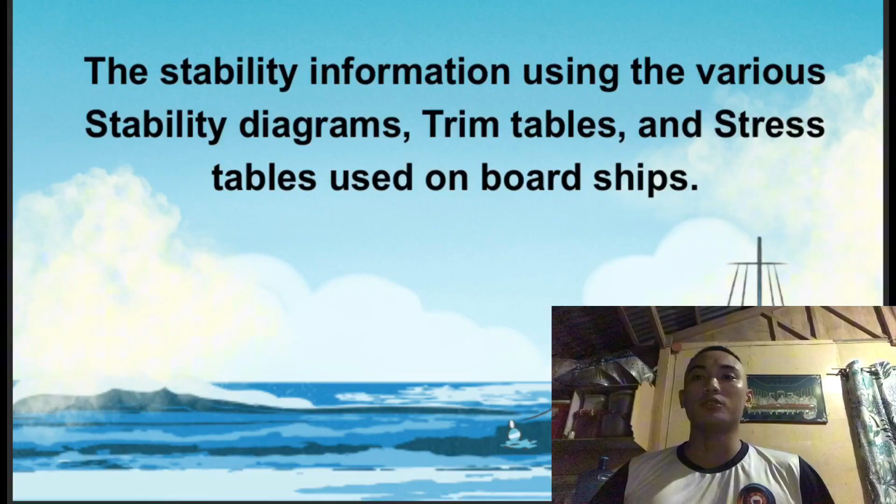So for today's video, I'm going to discuss the stability information using the various stability diagrams, trim tables, and stress tables used on board ships. So stability diagrams. These diagrams visually represent the forces acting on a ship. They show the CG, CB, and M, which are crucial for understanding how a ship responds to heeling or tilting.

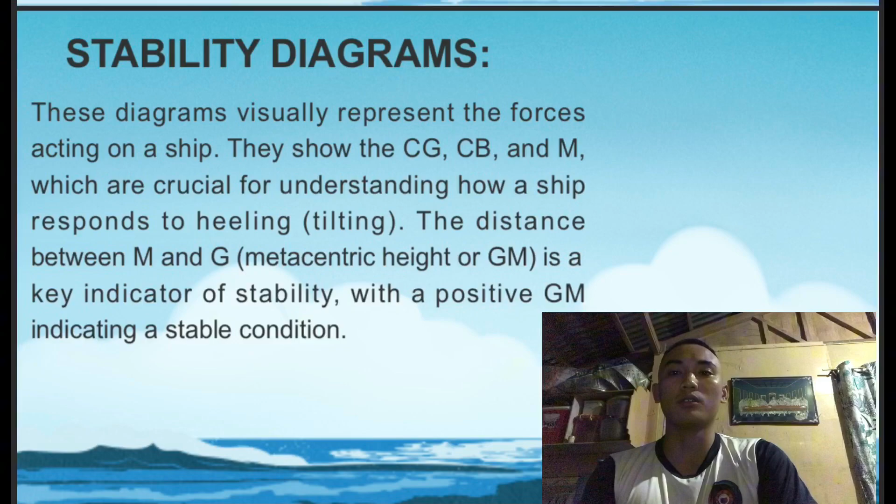The distance between metacenter and center of gravity, or metacentric height, is a key indicator of stability, with a positive GM indicating a stable condition. Stability diagrams illustrate the relationship between the center of gravity, center of buoyancy, and the metacenter.

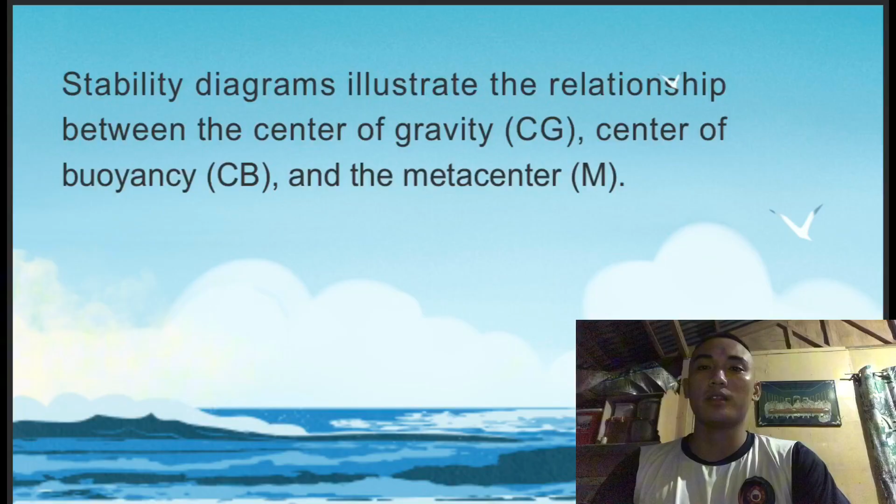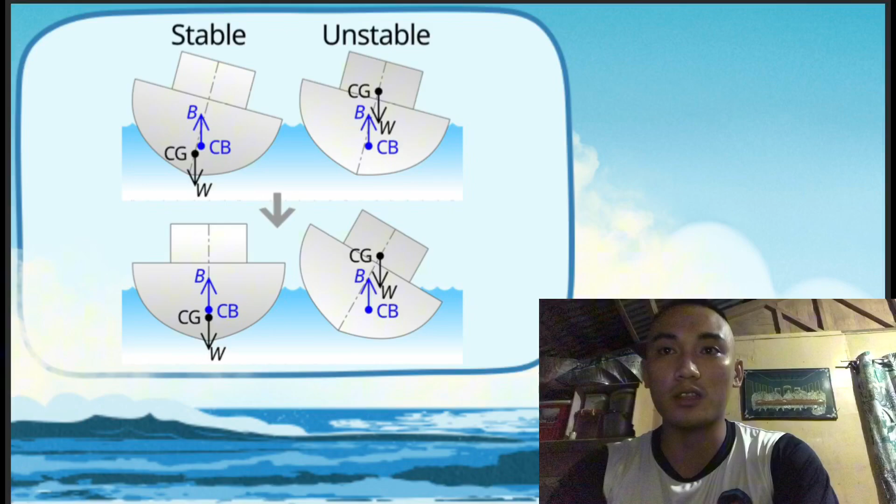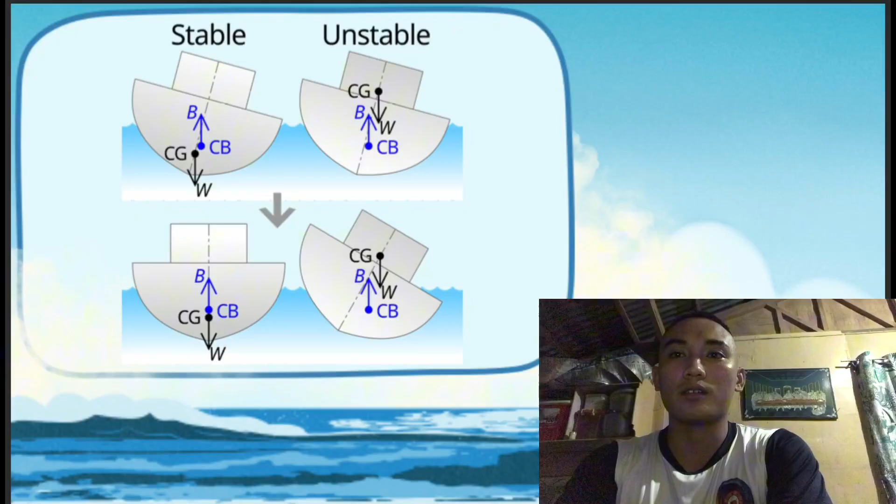Trim tables provide rapid and reasonably acceptable drafts forward and aft after loading, discharging, and shifting weights that are not too large. These tables are usually part of the ship's stability booklet. The tables provide for change in draft forward and aft when tanks are filled to their capacity, and for loading of 100 tons weight at different positions along the ship's length.

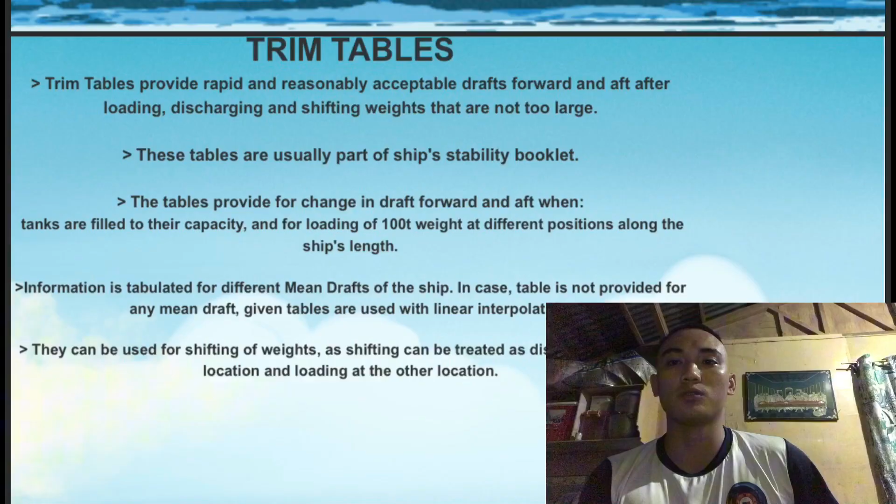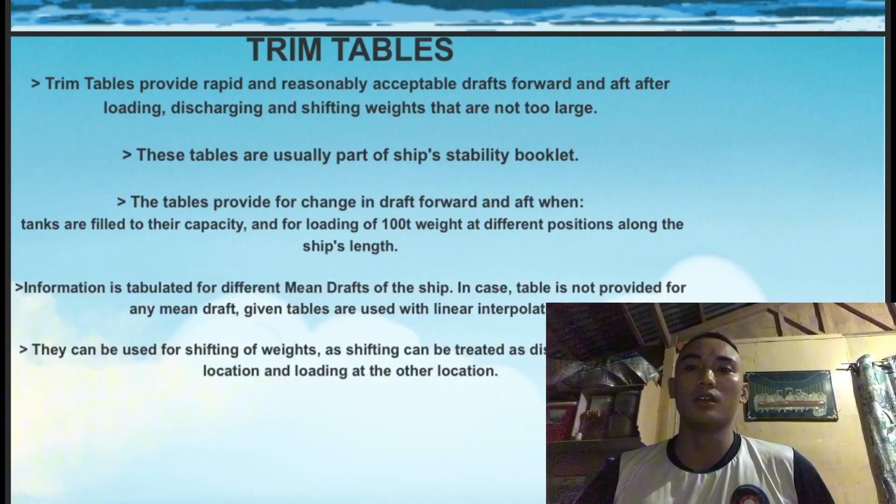Information is tabulated for different mean drafts of the ship. In case the table is not provided for any mean draft, given tables are used with linear interpolation. They can be used for shifting of weights, as shifting can be treated as discharging from one location and loading at the other location. This is the trim table.

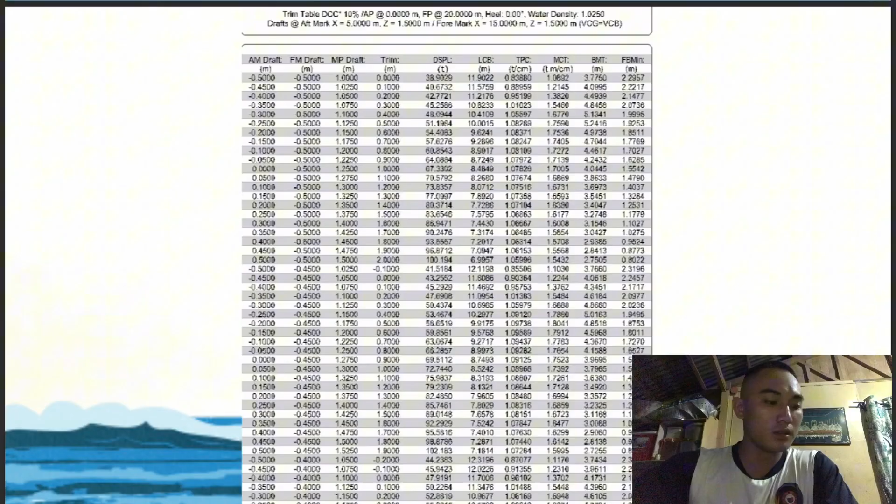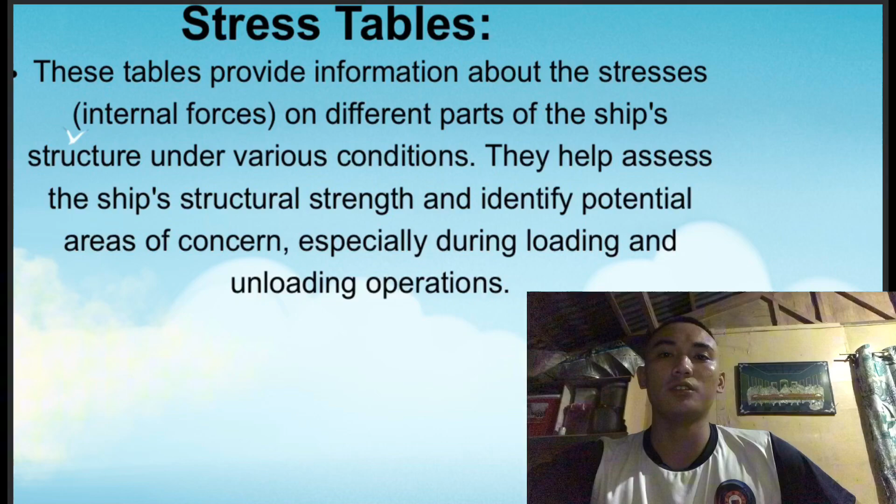So stress tables provide information about the stresses or internal forces on different parts of the ship's structure under various conditions. They help assess the ship's structural strength and identify potential areas of concern, especially during loading and unloading operations. So as you can see, these are the stress tables. So when can we use these tables?

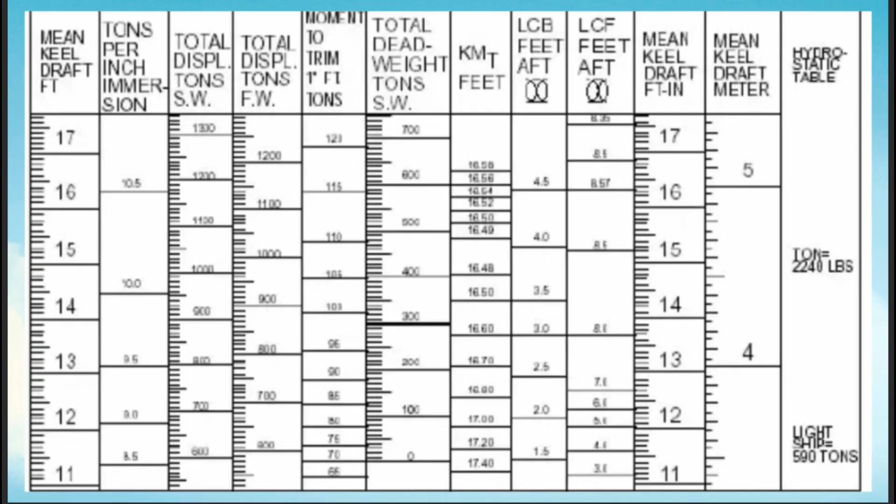There are hull bending moment, or hogging and sagging. Compare the ship's current loading condition against permissible bending moments. Check if the bending moment falls within the safe range indicated in the table. Shear forces. Ensure the total shear force at any section of the ship does not exceed structural limits.

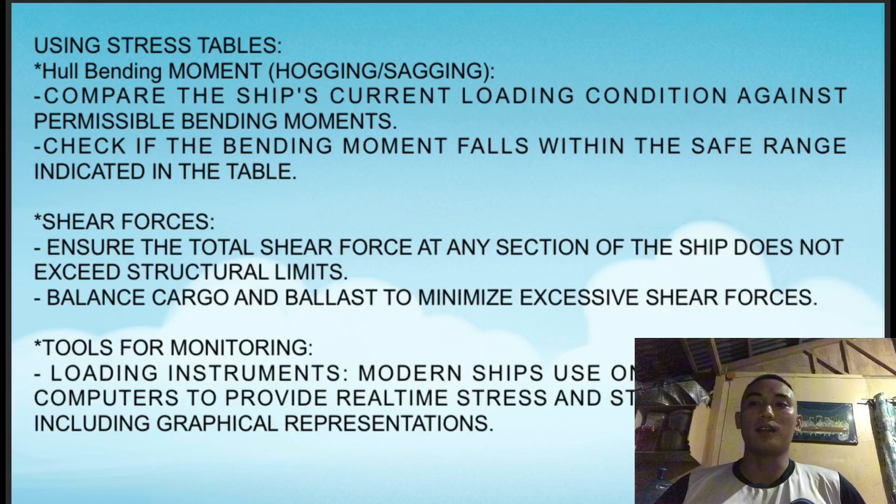Tools for monitoring: loading instruments. Modern ships use onboard loading computers to provide real-time stress and stability analysis, including graphical representations. And that's all for my topic.